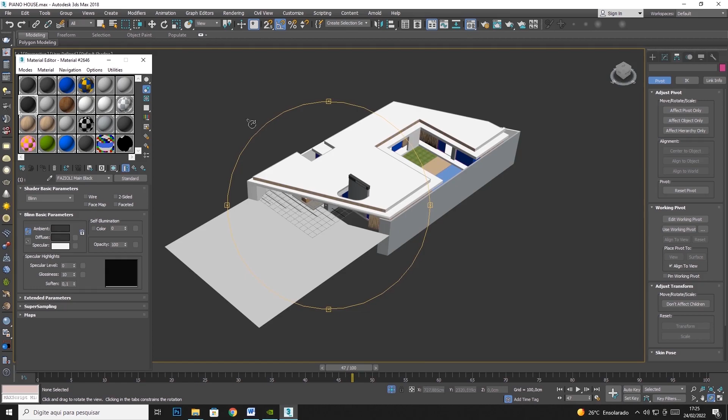Let's talk now about the exportation of the files. I left here the final version of this file in Max.

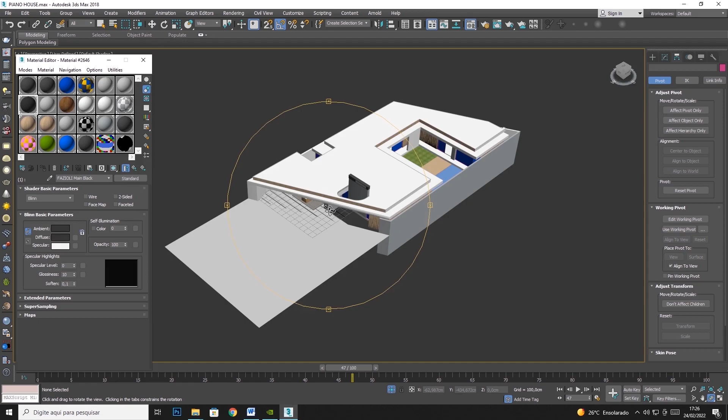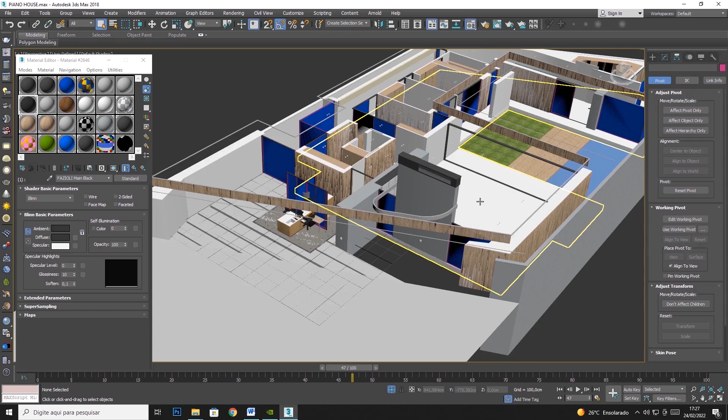So let's go. What did I do between the last class and this class? I verified the mapping of all the objects, tagged if it was correct, if the direction was correct. Everything's correct now. Another thing I did was replace the materials that were Corona and Arnold into standard.

If you select the piano material, everything here is in standard. This black, all of this, all of them are in standard. All of it was replaced, for all objects, so it's going to be easier to work with this. Look, standard as well. So yeah, everything is in standard.

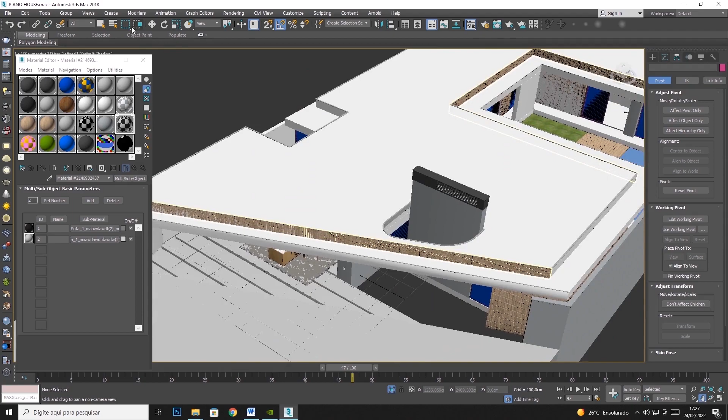Also, the pivots were corrected based on that criteria we talked about. For example, if I want to move something in Unreal, I'll leave the object aligned to the 0 of the world. But if I don't want to move objects like walls, ceiling, floor, I'll leave it like this. Let's see the layer explorer.

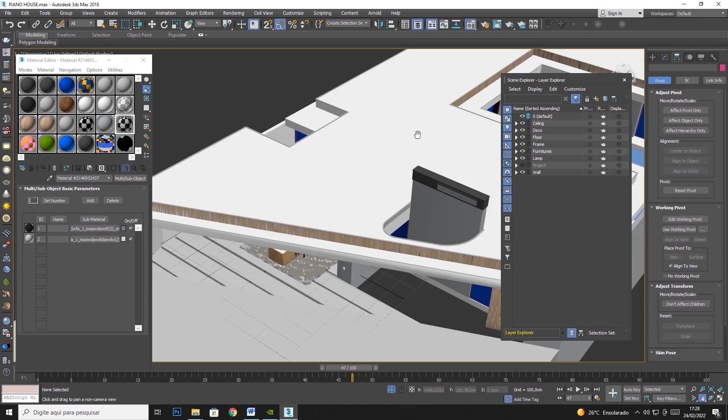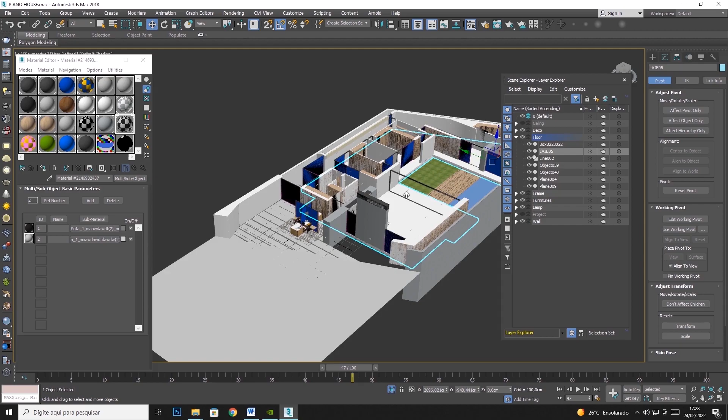Here we have the ceiling that is aligned to the pivot where it was. I didn't want to change the pivot positioning — the decorations we'll talk about soon. Let me see the floor. It's already adjusted in the position it was, at the 0 of the world. I'm not going to adjust the floor because I'm not going to move it.

The frames, I'm going to keep. The furniture, this, okay good. Let me take the furniture and leave just the frames.

What I did with the frames specifically — these frames are basically frame and glass. However, some of these glasses are sliding glasses, going to the left and to the right. Some doors open and close. And on Unreal, these objects can be interactive — for example, as the character approaches, the door will open, and as he moves away, the door closes. We can create that interactivity there.

For that, I made some windows I want to open and close to release access for navigation. I'm going to move these doors. For example, this door here is for this area, the living room, the main living room. Let me get the wall here so you can see — it is one of the main living rooms.

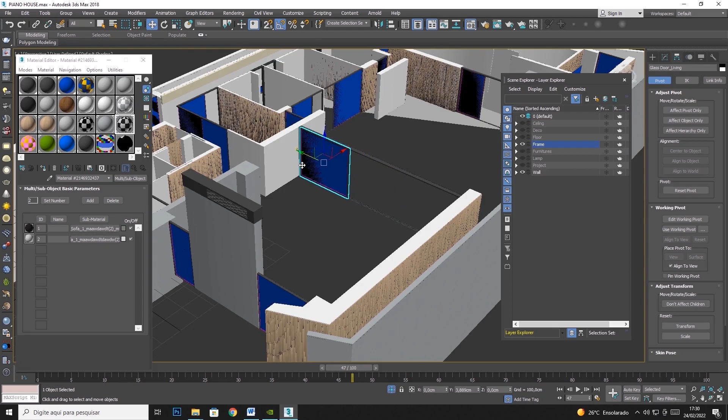During the navigation, my character comes here and the door is going to slide like this, then slide like that. For me to do that with the pivot distant, it would be really hard to adjust the position of the door to create the animation. So what I did was put the door at the 0 of the pivot, left it in the center. There in Unreal, I can put the door in the right position and animate this — it's going to be much easier.

Same thing here, this door is from a room, for example, this room here. Same thing — when I approach this door, it's going to slide.

A little bit different here with these two doors. I'm going to explain why. If you notice, the zero of the world is here. This door, I don't want it to move or open on the other side. I want this to open on the pivot, like if it was a door like that, with this rotation. But Unreal considers the pivot of the world, not a pivot on the object.

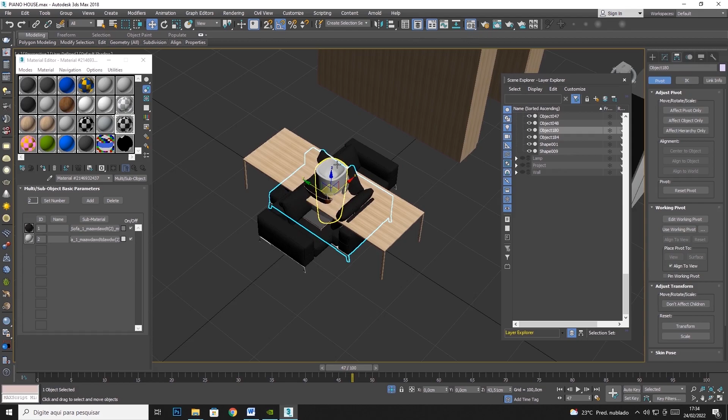Let's see, I'm gonna delete it. Okay, yeah, after we can duplicate this just in case. So the piano, probably I'll move it, so I left it here in the center of the pivot. The sink as well, the one as well, if I want to use it in some other project it's okay. The chair as well — remember we had 6 chairs — so I just left one here because I can copy it on Unreal instead of adjusting 4 positions.

Okay, so let's do this. What else do we have? The table as well, the couch, yeah, the bathtub, couch, this one. One of the armchairs — we have 2 armchairs actually — let's delete one. What else do we have?

Let me see, what is this? Okay, also we're going to move there on Unreal. Let me see, okay. Let me see, okay, we can save it. And this one as well. So if I want to move this chair on Unreal, the pivot is in the center, so it's okay.

Let's see about the little armchair, the little arm. We can just here, okay, let's select the polygon. Oh, it is already selected. Cool, but we have more things selected, so let's select these two. I think we have one more little screw. Let me save it. Select the layer. Cool, let's copy this now.

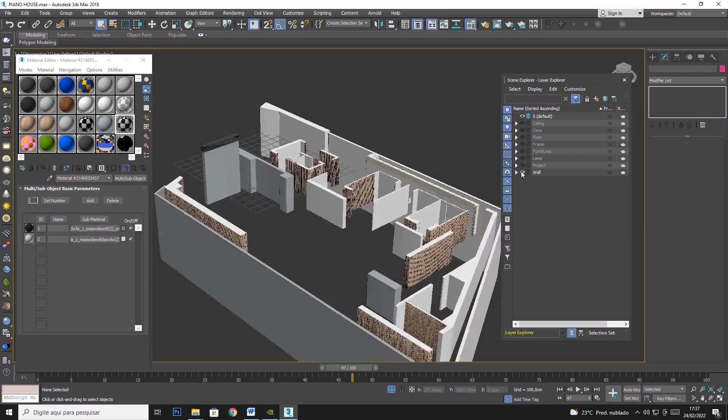Cool, now everything is just one object. So all the furnitures were corrected, the pivot, okay, the lamps as well. Yeah, cool. The walls I kept the same way because I'm not gonna move them, and the project we don't need to send it. Nice, so we have all the pivots corrected. Our project is ready to be exported to Unreal. Let's save this, because this file here is going to be available for you to download.

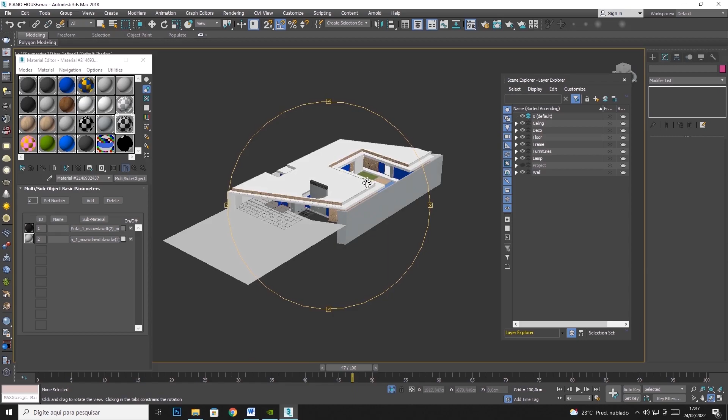So how can we export this file and send it to Unreal? It's very simple, you just export it in FBX. But instead of exporting all the project, let's export this in a segmented way because it's going to make it easier, and we can work in an organized way this way.

Let's get started, exporting this ceiling. Select the elements, export, and that's it. Look, I created a folder here, FBX folder. Remember the pivot tests? I'm going to delete them so we can get started again. We don't need them anymore. Let's delete them. And I'm also going to delete this folder here. So there's no folder anymore, but we're going to export together all the files in FBX.

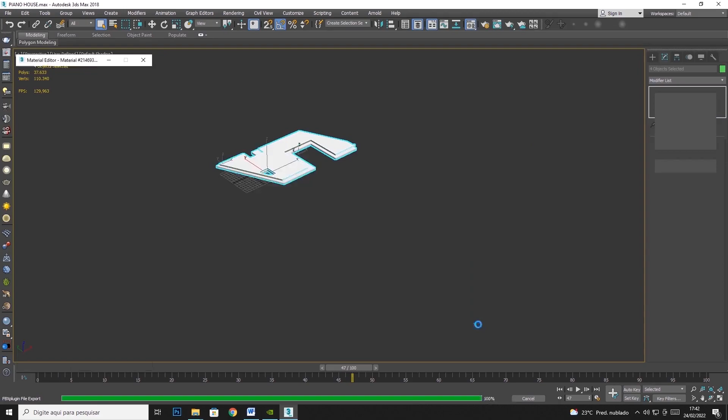Great, there's an important thing, but don't worry, we're gonna do it now and I'll explain. Export, let's create a folder, let's call it like this: SM underline deco underline. Including, Unreal doesn't understand space, so if you're going to type some name, use underline, because Unreal doesn't understand space. Put this underline in something, and that's okay. It also fits static mesh, materials and other things. Always name with underline instead of space.

Cool, let's save it. Here, important: go to preset geometry, it's going to export this, leave it marked, because if you have a very cracked mesh with little segments, it will give a smooth to the mesh. If the model has turbo smooth, it will export the turbo smooth from the mesh. It will preserve the edge orientation. As we don't have an animation, you can leave it like this.

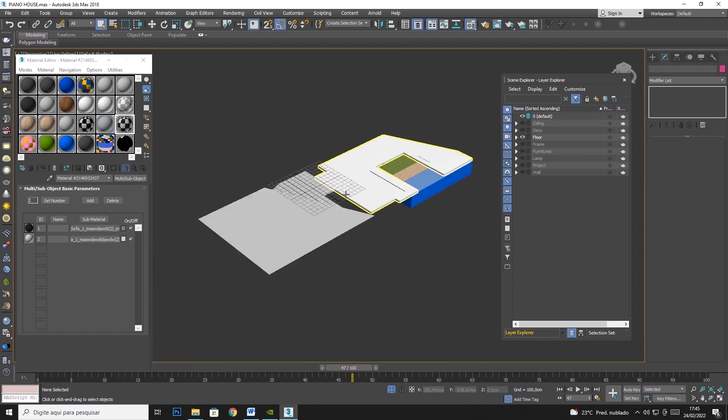Cool, so the deco is done. Let me check the floor. Select everything, file export.

Right here, let's create a folder. Static mesh, SM underline floor underline. Okay, great, so we can minimize it.

Next, the frames. Let's select export. Folder, frames. SM static mesh underline frame underline.

Let's see, next. Okay, the furnitures, export, select furnitures. Static mesh underline furniture underline. Okay, great, it's marked, that's it.

We are exporting, yeah cool. You also can export the whole project, but it's not really interesting because if the project is really heavy, a really huge project with a lot of elements, you can have problems on Unreal and it gets closed. So it's better if we do it segmented like this, it's more organized.